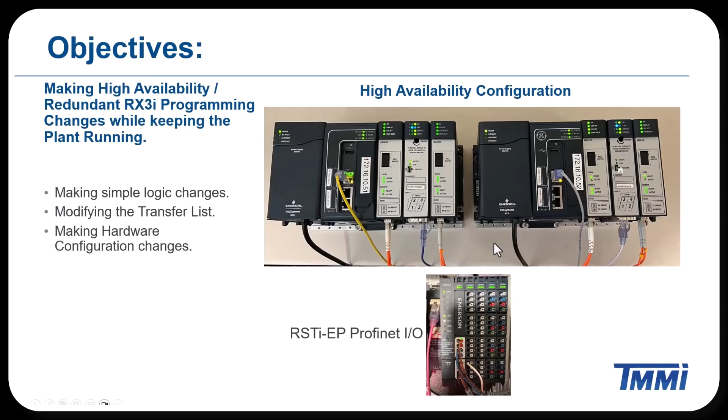Then I also have a Profinet controller, which is connected to some Profinet scanner RSTi-EP I/O below. So that's our setup that we're going to be working with. Okay, well, let's go ahead and jump into this and get working on it.

To get started with, I have my primary configuration connected to the PLC. I am running with my configuration equal, my logic is equal. If I click on my fault tables, I can also see that my primary unit is active and my secondary unit is available as backup. So we have our system all running, and we're going to just make a logic change.

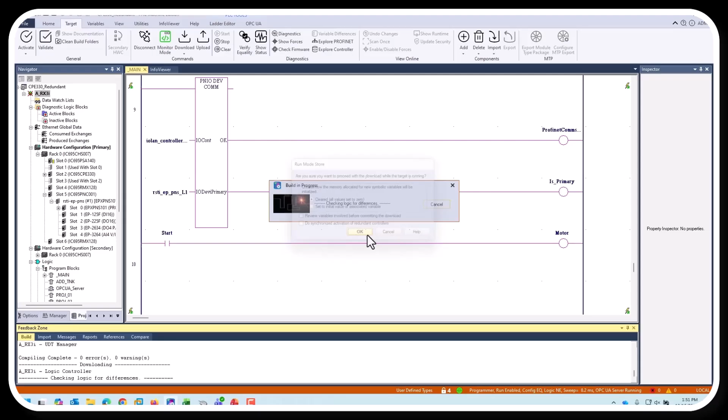We can do this by simply doing a run mode store by clicking on the download button here. It'll build our project to make sure there's no errors or warnings, and then I can hit OK. Now the download is complete. The config and logic are equal, so that's been updated.

If I wish to update my secondary controller now, I need to disconnect from the primary. You'll note that when I switch my hardware configuration, the bold text here on the primary will switch down to the secondary. So when I do connect, it's going to connect to the target that has the bold text.

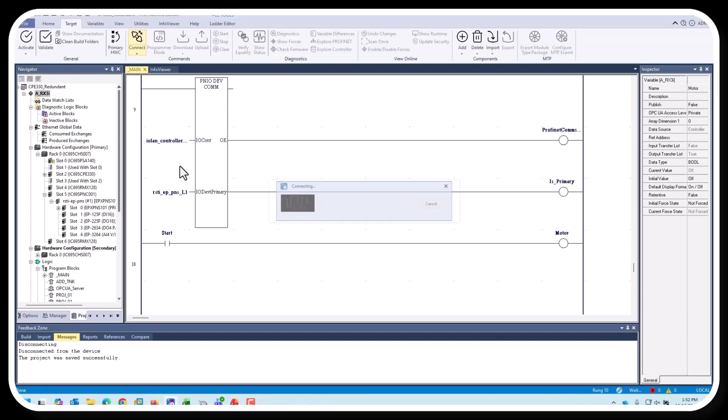So I'm now connecting up to the secondary. You can see that it is also running. I'm in monitor mode, and my logic is not equal because it doesn't have this rung of logic in it at this point. I'll go to programmer mode, and then I'm going to choose download. And the download is complete, and the logic on both primary and secondary have been updated. Okay, let's disconnect from our secondary.

Go to our primary, and this time I'm going to go and work on the transfer lists, and I want to add my start variable that I see over here in my variable inspector. I want to add it to the input transfer list, so I'll change that to true. And then on my motor, I want to put it in the output transfer list. Make sure that's true. So start is going to be in the input, and motor is going to be the output transfer list. Okay, I'm going to hit the save button here to update it.

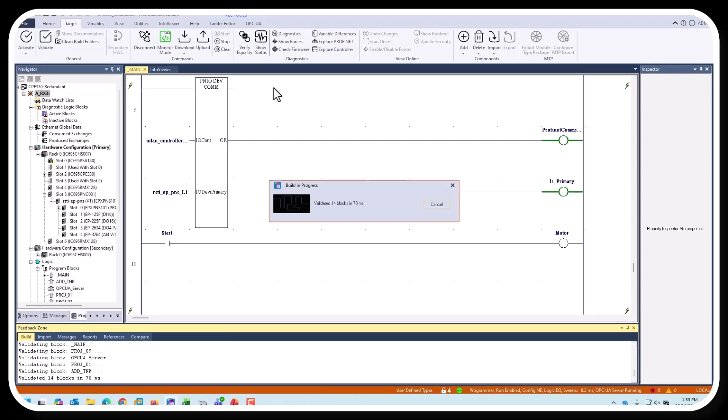And then I'm going to go back over and connect to my primary controller. Okay, the primary controller is connected. I'm going to hit the program mode so that I can make changes, and I'm going to click the download button. This time I want you to note that the do synchronize activation of redundant controllers is checked. If we make transfer list changes, we need to make sure that this is checked. So I'll hit OK on this.

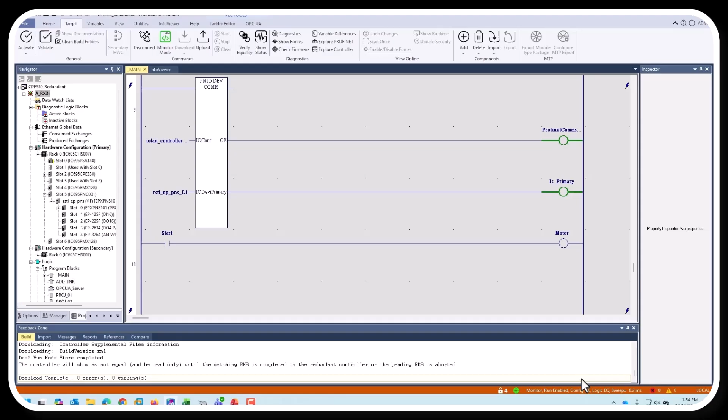Okay, so it's downloaded to the primary, but it isn't synchronized until I go and download to the secondary. You can see over here it says configuration not equal at the moment. So to get this equal, we disconnect from primary. Set the secondary as our active target. I'm going to connect up with the secondary now to do the download for the secondary. Go to programmer mode so we can make the change and hit the download button.

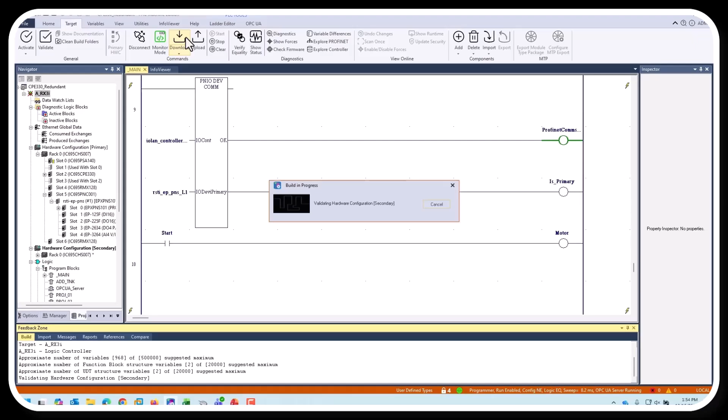You can see it says synchronization right here as well. We can see that our configuration is not equal, and I will hit OK to send the download in. Now I have the configuration is equal, the logic is equal, and if we go back to our primary controller, we can see that it is also going to be equal and everything is running.

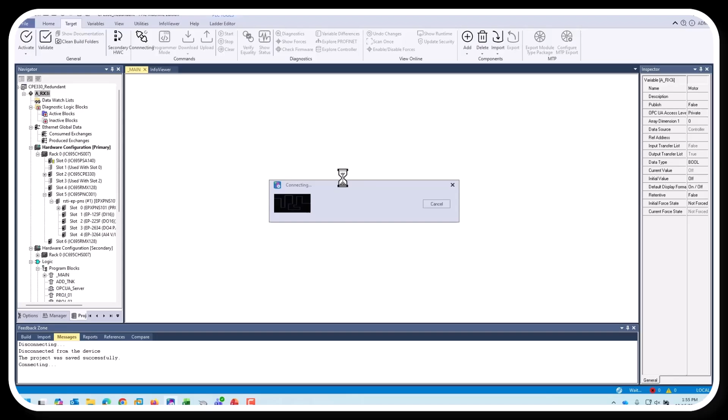So connecting up to primary. There we go, config equal and logic is equal. Perfect. So that's our first two cases we talked about. One, we made the simple logic change, and then we made a change to the transfer list. Next, I want to demonstrate how to do a hardware change in our hardware configuration.

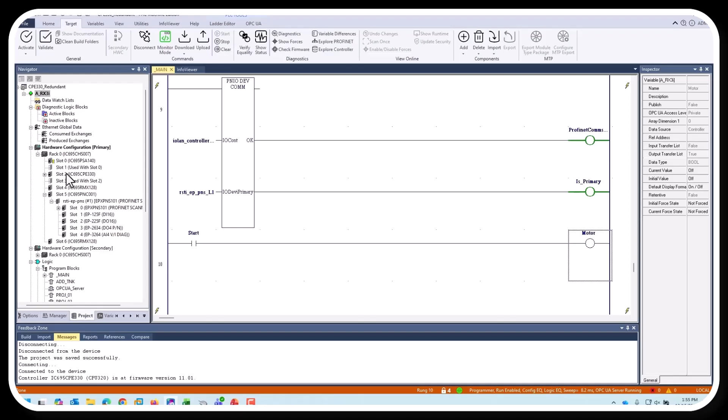So I'm going to go over to our hardware configuration on our primary, and I'm going to select this analog card, and I'm going to change the reference address location of where the values are going to be stored. I'm going to change it from AI1 to AI11. So I've made that change, and then I'm also going to go over to my primary.

Since I've made that change, I'm going to go over to the redundancy. I'm going to hit mirror. This will copy all of the changes I made on my primary, and it will mirror it down to the secondary rack. So this address will now be changed on our secondary as well. And just for good measure, I'll mirror the hardware configuration that was in the whole system.

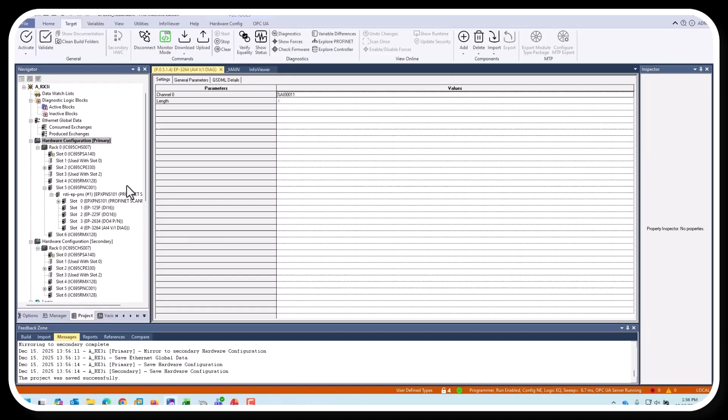And now I'm going to save this, so it's being saved to the system, and we're going to go back and look and see primary unit is active and secondary is backup. Since this is a hardware configuration change, you'll notice that it says configuration is not equal. To get the configuration equal, we're going to need to stop our processor.

But right now our primary unit is the active unit. It is the one that is currently running the plant. Now what I want to do is a role switch. I want to switch my primary from running the plant to the secondary to be running the plant. And this can be done in several ways.

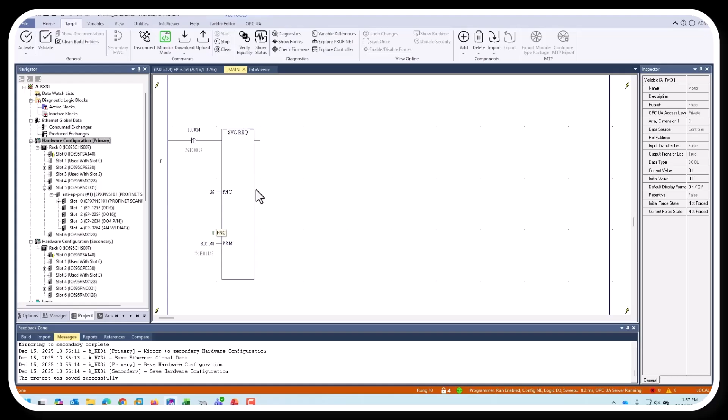First off, you could programmatically execute this service request function number 26, and that will create a role switch. Alternatively, you could press the buttons on the redundancy memory exchange module in the rack. That will also institute a role switch. Or if you simply stop the processor, it'll automatically role switch.

In my case, I'm going to run this service request. I have an input that is tied to number 14 here. I'm going to press that button now. And when I press it, I'm going to let you guys watch the update happen here. So when my hardware configuration fault table updates, you'll see the secondary unit is active and the primary is backup.

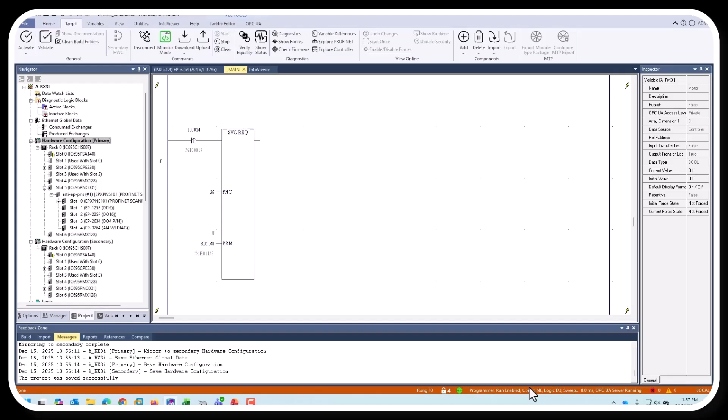So now that my secondary is currently running the process and keeping the plant going, I can go back to my main program here, and now I'm at a point where I can stop the controller to do this change. So I'll hit stop. This will drop out the run on the primary. Remember, we're still running on the secondary, so it's keeping everything going. And then I'm going to do my download. So we're building our project, and then we're going to be downloading it directly into the system.

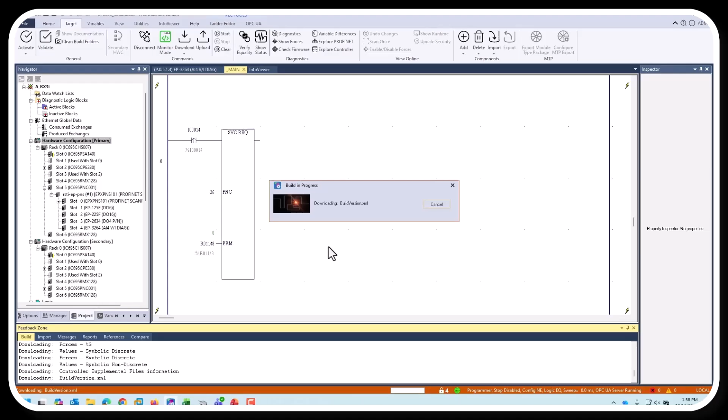Okay, we're complete. Notice my configuration says equal here, and I'm going to put us back into run mode on the primary. Okay, so the primary is now running, but it is still not the active controller. If we go back, our secondary is running the program. So what I want to do is, since I'm going to have to stop the secondary, I want to role switch it back to the primary.

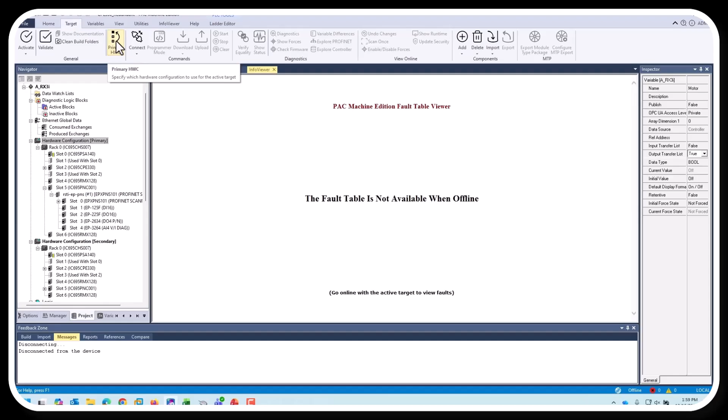I'm going to press my input number 14 again, and that will role switch me back to have the primary unit active, and now the secondary is backup. So I'm going to disconnect here from our primary controller, go to our secondary controller, connect up on that, go to my programmer mode. We can see it's still active here, and I want to do the download

to update the secondary. Oh, I forgot to stop it. Can't do the update without stopping the controller. Stop it, then do the download. Remember, primary is still running the plant. So over here you can see configuration is not equal.

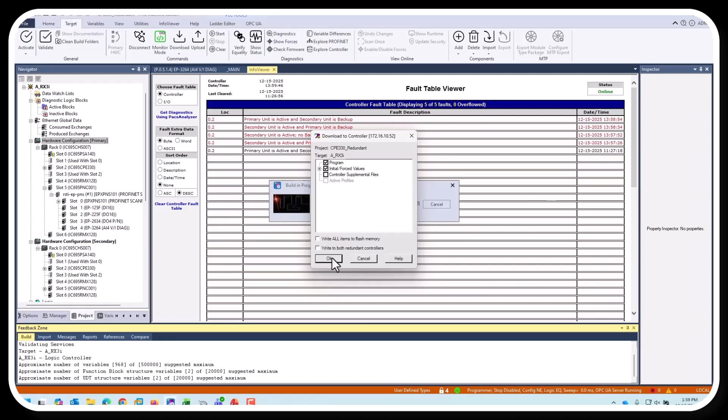So we are going to write to the controller right now to update that hardware configuration with that new reference address that we put in on this analog input module. Okay, and then we can put it back into run mode. All right, so primary is running, the secondary is now backup and it's ready to go.